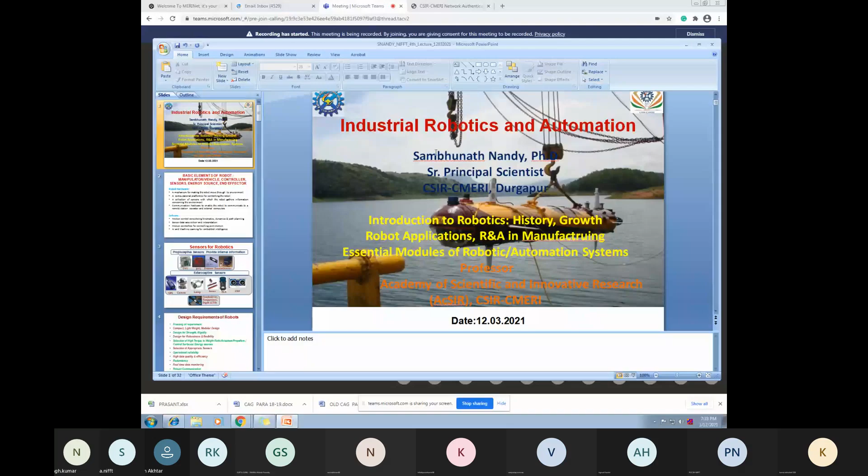Okay, so in our previous class, I think we have started about the basic modules of robots and what are the hardwares and various components of a robotic system required to develop it for industrial applications or other applications. We also discussed the evolution of various robotic systems, starting from a humanoid robot developed by Honda, which they named Asimo, Advanced Step in Innovative Mobility.

Further, we also saw how the development of manipulators took place, starting from 1960, where Unimation Inc. developed a very primitive manipulator. At present, we see various industrial manipulators being used for various applications, starting from manufacturing to completely hazardous environments, nuclear environments, and others.

And probably you know that there are very promising companies like Fanuc Automation, KUKA Robotics, ABB Robotics, or Motoman. These are the pioneers in industrial robotics, and industrial robotics growth is taking place due to the contribution from this industrial sector.

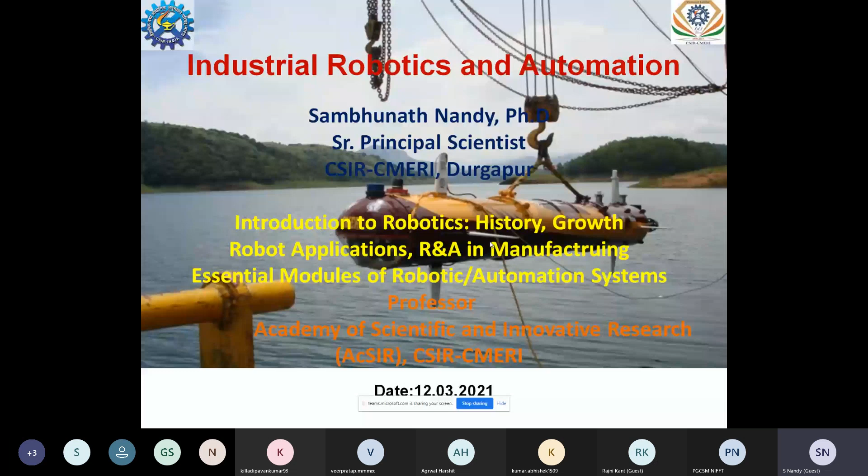Some of these things have been covered in your previous classes, but I will quickly go through this once again. So the basic elements of a robot: robotic hardware, which is nothing but a mechanism for making the robot move through its environment, a computational platform for controlling the robot, and a collection of sensors. This plays a very important role for the robotic system.

Whenever you are applying any automated or robotic system, you need to get the feedback of what your instruction was and what the robot or instrument has performed. Based on that sensory or feedback information, you can calculate the error associated with the system, and in the next step you will be able to provide compensation for the error that has accumulated up to that step.

So sensors, just like our eyes, nose and ears, play a very important role for any robotic or automatic system to get the feedback and to provide the corrections or compensation accordingly.

Then communication hardware to enable the robot to communicate to a remote station operator and external computers. Like if you are deploying a robotic system for a nuclear environment, in that case communication plays a major role.

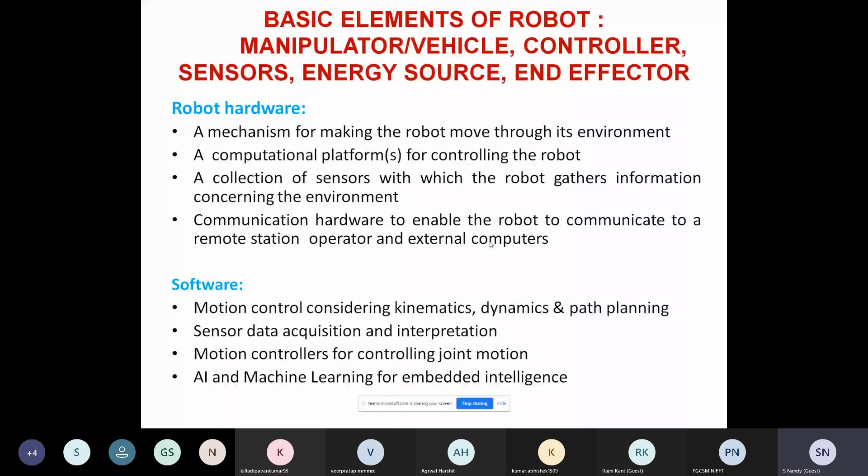So I have also discussed in our previous class that sensors can be classified as proprioceptive and exteroceptive sensors. Proprioceptive sensors provide internal information of the body, like position, velocity, acceleration, etc. Exteroceptive sensors provide information about the environment, like temperature, pressure of the outside environment, environmental view, or range and bearing of an obstacle.

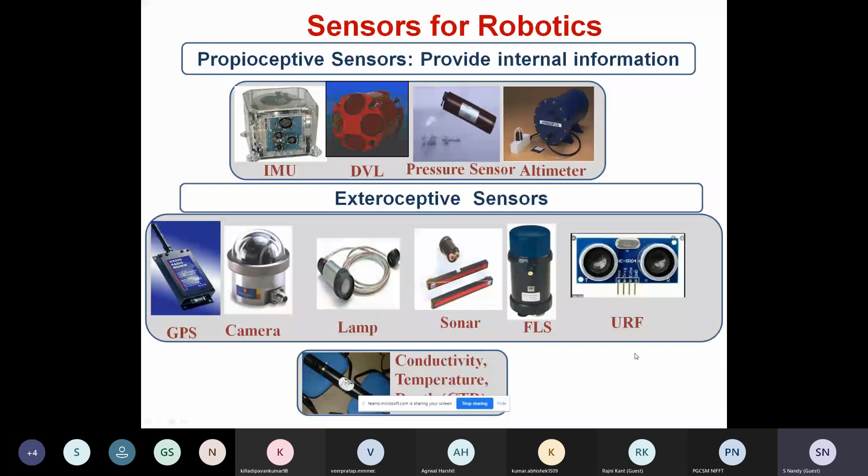Like an ultrasonic rangefinder - what it does is measure the range and bearing of an object, and then that information will be utilized by the robot to avoid the obstacle. Similarly, we use proximity sensors so that a robot doesn't hit any wall or solid object. These are the design requirements that we have discussed in our previous class.

So requirements are very important. Suppose for a manipulator, we need to know the payload capacity, the maximum velocity it should move, and what will be the reach of that robot. Reach means what will be the vertical reach and what will be the horizontal reach maximum. So these three, four things.

And if there are any other restrictions - suppose it is needed to operate in a nuclear environment, in that case the material should be chosen accordingly.

And if there is any weight restriction, in that case also we need to see whether we can use materials like aluminium or some special grade aluminium alloy like 6061 T6 or 7000 grade aerospace material, or some alloy like titanium alloy.

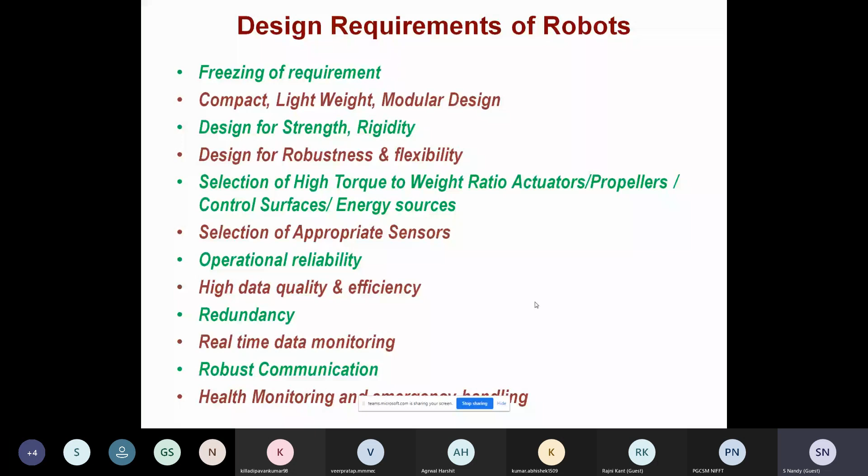This is required, but for each and every robotic system, we need to check the payload it will be handling, the maximum velocity, and the maximum acceleration. We will be able to know the maximum momentum the robot will be subjected to, and accordingly we need to design the structure of the robot so that it doesn't fail with critical parameters when it is handling.

So this evolution we have already discussed, how in space robots also the development took place, and Indian Space Research Organization is playing a vital role in this domain.

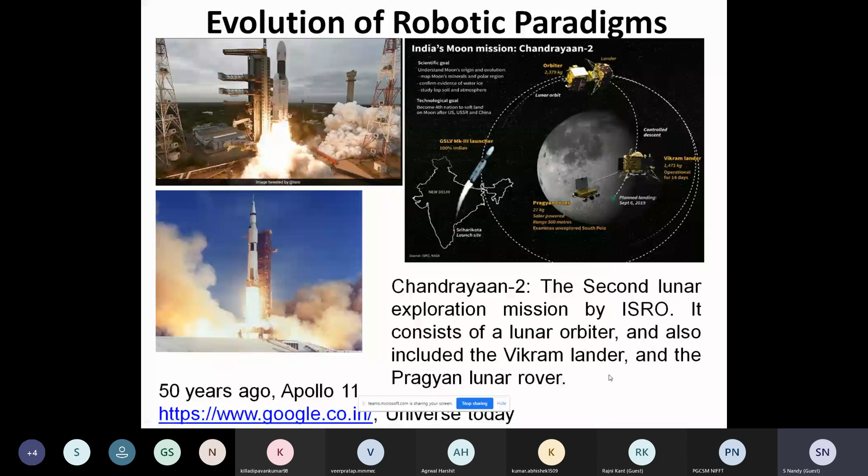Presently, for mobile robot manipulation systems, these are being used in various shop floors, and at present the status is the autonomous mobile robot, which will have onboard intelligence, onboard power, and is flexible. It should have flexible workflows and be able to operate in a collaborative and faster manner.

Collaborative means, suppose there is a work envelope, say a workshop of 300 by 400 meters. In that case, one robot will take some material and hand it over to another robot. The second robot will take the material to another station and hand it over to another robot. That's why it is called collaborative, or sometimes it might be complementary also.

So two robots handling one heavy material are sharing the load. In that case we say it is collaborative as well as complementary. Various kinds of development have already taken place, and KUKA Robotics is also a pioneer in this field.

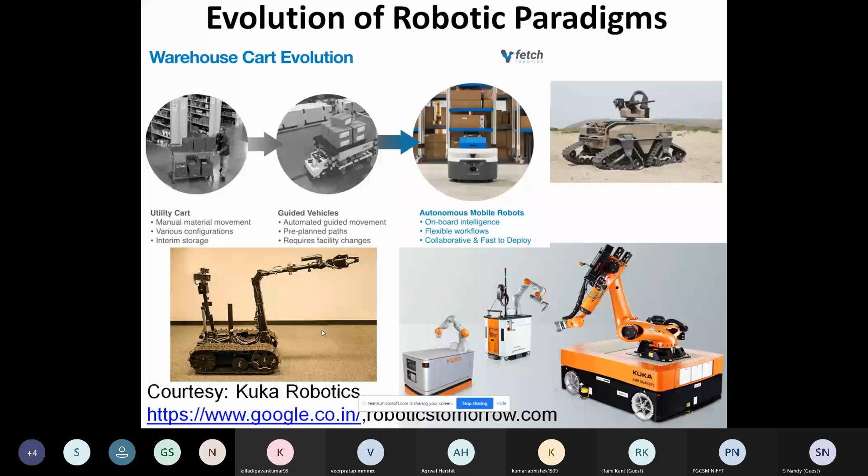This is also discussed, and the manipulator-related rotation matrix, associated mathematical modeling, and kinematics of robots will be discussed by my colleague from the next class.

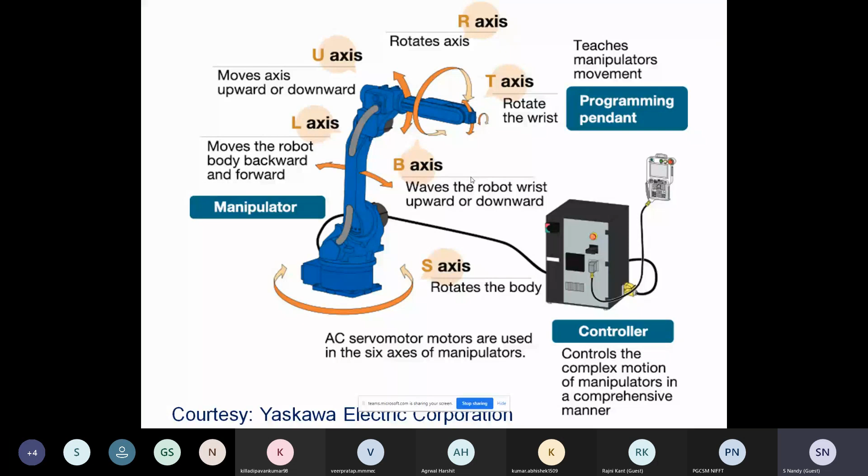So robot manipulators we have discussed, but let us repeat it once again. These manipulators are of two types: serial manipulators and parallel manipulators, and a combination of these two is the hybrid manipulator. This manipulator is a serial manipulator, it has an open link, but the robot is not a closed link structure. It is a serial manipulator, an open loop mechanism.

And this is a parallel manipulator, you can see this is the Stewart platform. This kind of parallel manipulator is more robust compared to the open loop mechanism or serial manipulators. Another advantage of the parallel link manipulator is that it can handle more load compared to the serial link manipulator.

The third advantage is that the Stewart platform or parallel manipulators are more accurate compared to open loop or serial manipulators. Considering the joints of a robot, it may have different kinds of joints. The joints are primarily of two kinds: one is rotary joints and another is prismatic joints. Rotary joint is just like a motor you are rotating.

The motor rotation is fitted with a gearbox, and then you get the rotation as desired based on the gearbox, or it might be fitted with a variable voltage, variable frequency VVVF converter also, so that depending on the frequency variation you get various speeds of that joint. So in this manipulator, the structure shown has all joints as rotary joints, meaning the motor is rotating and these joints are also rotating.

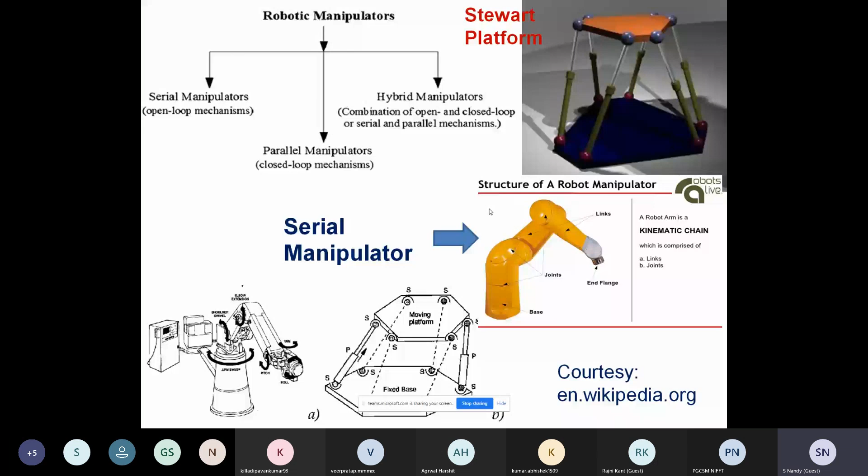Already you are aware that the fourth industrial revolution has taken place, and now we are looking for the fifth industrial revolution. The first industrial revolution is mechanization, water power, steam power - these are the major developments. The second industrial revolution involved mass production, assembly lines, electricity, mass production in the automobile industry, and the use of robots gradually increasing.

Automation and computers came up during the 90s, and from that point onwards mass production took place, with robotic systems or manipulators being used for welding and oiling of cars in the automobile industry.

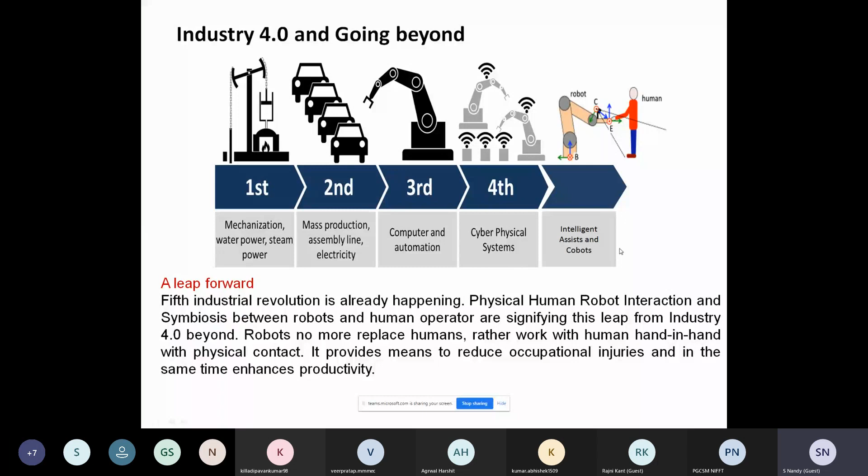Now the fourth revolution is related to the cyber physical system, and probably we will get the information shortly that the present requirement is collaboration between human and robot, where the basic objective is not to reduce the manpower of the industry, but to jointly work together - the robot and human being will work hand in hand, and in that way it will be possible to increase the efficiency of a particular industry as the business progresses gradually.

So five factors are supporting the growth of robotics. The first one is collaborative robots in the automation industry - collaborative robots which can work in collaborative or complementary mode, joining hand in hand, with all the automated features like intelligence, their own power system, and the ability to move along a guided path, or with further intelligence, to avoid obstacles.

Robotics as a service is a new business model. From most Indians' perspective, people are also going for development of service robots, because service robots are still an ever-growing field. Industrial robotics as a domain is mostly matured, but service robotics is still green - there is a lot of scope to further develop in that domain. In India also, people are carrying out research in service robotics so that we can gain some hold within a shorter time.

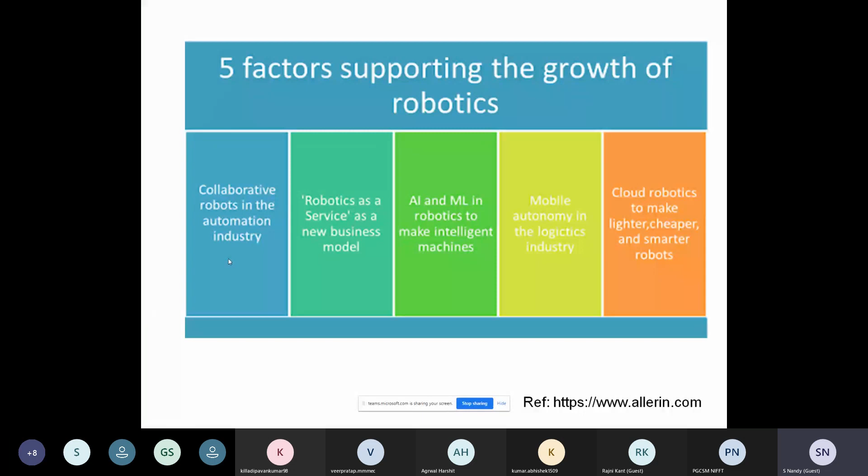Then mobile autonomy in the logistics industry, just like Flipkart or Amazon - they are deploying mobile robots with manipulators also, to carry out their operations faster and increase their efficiency and profit. Then cloud robotics to make lighter, cheaper, and smarter robots. These are the modern tools that people will gradually learn to apply in the industrial domain to increase their efficiency as well as make more profit.

The global market is showing a growth which is really inspiring. The global market for robots is expected to grow at a compound annual growth rate of 26% to reach just under 210 billion US dollars.

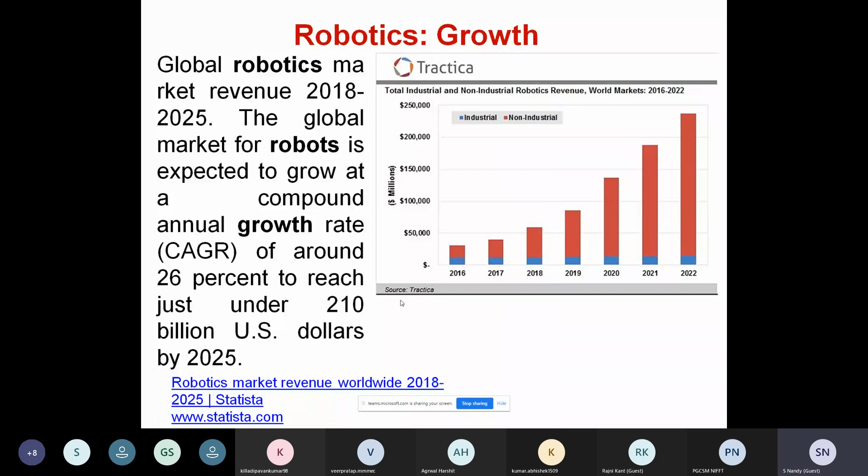By 2025. So if we see robotics and automation in manufacturing, there are a number of questions. Are these robots too expensive for businesses? Is the business too small to make use of robotics? Are robots difficult to program and operate? And will robotics cost human workers their jobs? These are very basic questions, and we need to handle or deploy robots in industry whenever we are able to justify these questions.

Robotic automation can be used across industries by many types and sizes of manufacturing. It helps manufacturers save money and create efficiencies to scale their businesses. This is very important.

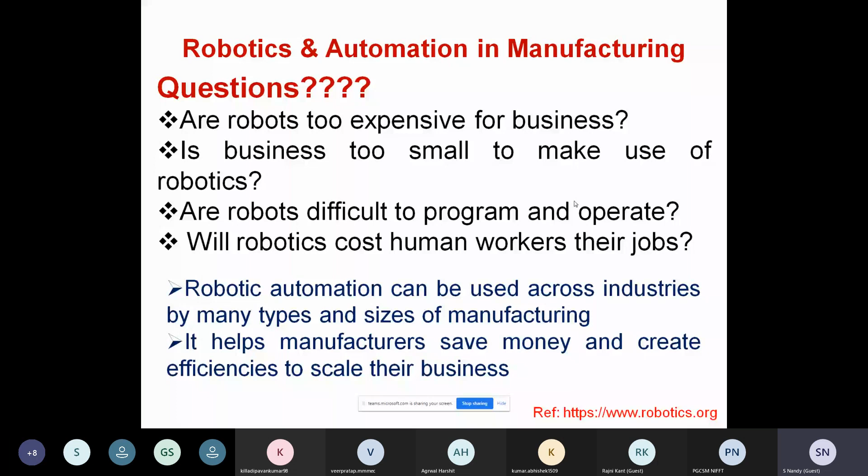Robotic automation has found its way into many different areas of manufacturing, starting from welding, assembly, shipping, handling raw materials, and product packing. This is robotic welding, and in the automobile industry, or for those in heavy industries, foundry, or casting, they have seen use of robots. Automobile industries adopted robotic systems very long back.

Automobile industries have adopted robotic systems for faster production, to multiply their profit. Just think of the spot welding of a car chassis - there are almost hundreds of spot welds required, or more, and that is carried out by robots at a much faster rate compared to what a human being used to do. This is also a tedious, repetitive operation, so it would be very difficult for a human being to carry out that job. That's why the robot is the ideal platform for that kind of application.

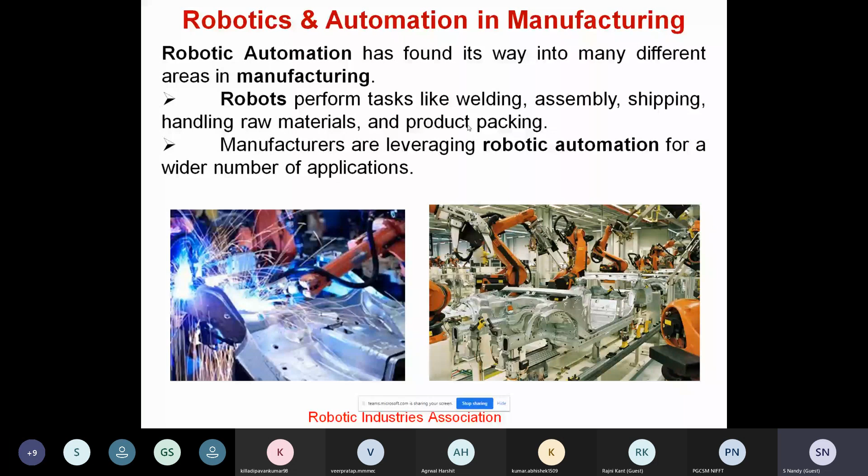Robotics are also being used at present for 3D printing, wire arc additive manufacturing, and various other applications we'll look at shortly. This is wire arc additive manufacturing - using a robot, people are developing a single component which might be very difficult to machine, or if you use a blank of a very hard material, which might be difficult to machine. Additive manufacturing or 3D printing helps develop that kind of material using the technique of wire arc additive manufacturing.

Think of a turbine shaft, where erosion takes place in a power plant, where turbines are used and the turbine blade or shaft gets eroded. In that case, robots for additive manufacturing, through laser cladding operation, can repair that. Present day, this kind of robotic system is very common around the globe, and some industries in India are also developing or have deployed this kind of robot to repair costly components which may not be possible with conventional methods.

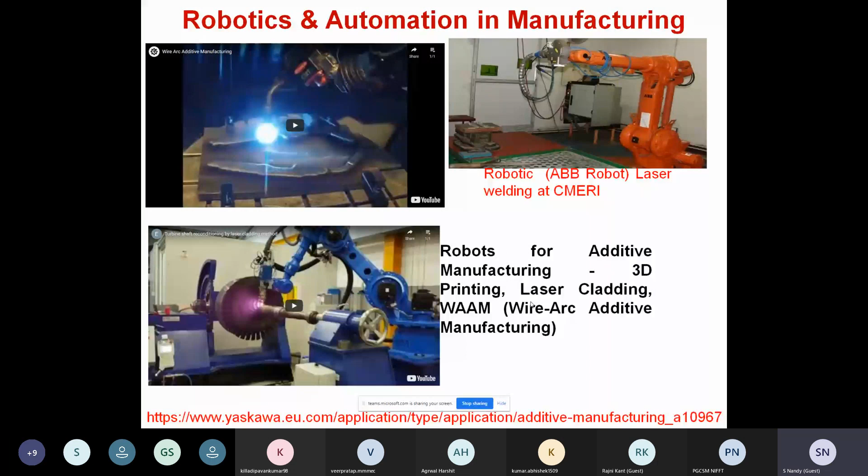At CMERI also, we are using laser welding with the help of an ABB robot, which is around 600 watt capacity. The use of robots for additive manufacturing is growing day by day, and it is a great step to achieve components like crane hooks or other single components at a reasonable price compared to other methods, if the quantity required is less.

Foundry robots can perform a variety of applications, including but not limited to die casting, gravity casting, sand casting, finishing, water or chemical cleaning, and forging. The major manufacturers of foundry robots are Motoman, Fanuc, KUKA, and ABB. Modern foundries are constantly looking to improve efficiency with the use of these Fanuc, KUKA, or ABB robots, increasing efficiency and flexibility.

It also improves workspace safety, because the temperature of a foundry shop when casting takes place is really very high, and it becomes difficult for a human being to sustain that temperature. That's why workplace safety is very important, and it is not feasible for a human being to operate in a dull, dirty, dangerous, and difficult environment. That's why people are gradually replacing humans in the foundry shop with robots to increase efficiency - not taking their jobs, but deploying robots to increase efficiency, productivity, and profit.

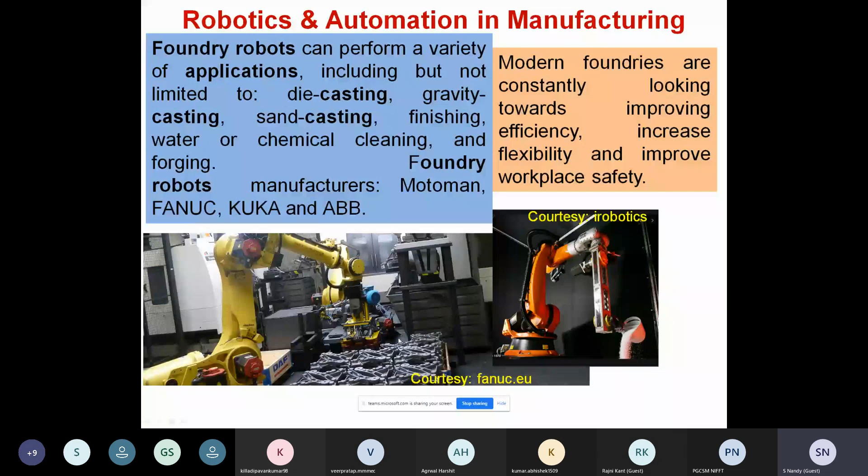Here are two robots, this one is from iRobotics. You can see that hot metal is being deployed, and this robot arranges casting components in whatever manner you require. Robotics basically saves money and time.

Robots first started being used in industry in the early 1960s. In the history of robotics, Unimation Inc developed the first primitive industrial manipulator.

Robots can now be installed in less time and less cost. A lot of robots have become modular, and programming also becoming easy. So it is not that to deploy any robotic system, the person working with the robot needs to know everything from A to Z. It is not required. He only needs to know how to operate the robot with the help of a GUI, the graphical user interface. He needs to know the initial starting point, the goal point, and how the instruction will be passed to the robot. So robots can now be installed in less time and less cost.

Increased sales have seen the prices come down dramatically, and built-in state-of-the-art facilities in the robotic system are being deployed nowadays. Basically, all the electronics components are being miniaturized day by day, and the size of the robotic system is also becoming compact, but the capacity is also increasing.

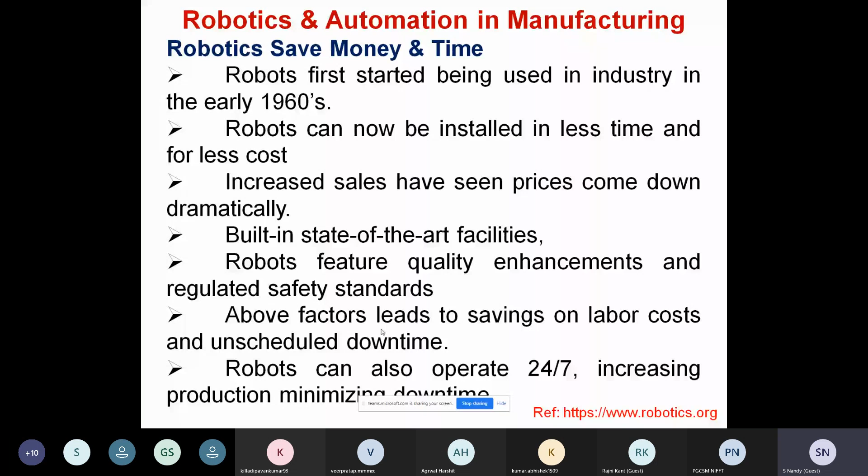Robots are scalable. Robots are used in high production, high volume environments, and can also scale down to be used in growing businesses. Modern robots can be used in low to medium volume manufacturing environments. Robots can be programmed and set up for new tasks quickly, and mobile bases allow them to be used in multiple areas of manufacturing facilities.

Just like in our first class, we showed a robot that can be deployed in a manufacturing environment for inspection purposes, and if that component is qualified for dimensional inspection, it can be transported to a particular place for further utilization. So mobile bases allow them to be used in multiple areas of manufacturing facilities.

Just like here, you can see the KUKA robot, which is attached with a manipulator deployed over that. This platform can be used separately, or the manipulator can also be used separately. But as a whole, these two can be interfaced and utilized in an integrated manner for various applications.

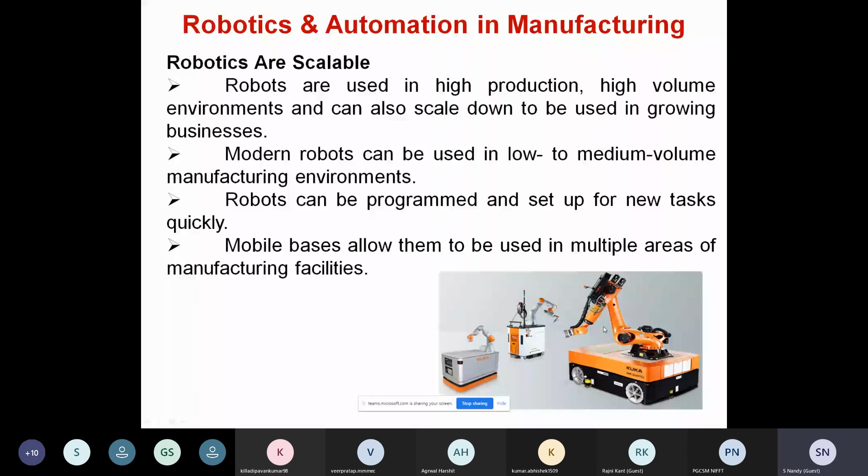Robots are easy to program. Learning complex programming languages to teach robots is not required or essential. If you are a robot developer, then it is required. Otherwise, from an application point of view, you don't need to know the complex programming of the robot.

Some of you may be acquainted with operation of CNC machines, where you need to know all the details of the steps the machine needs to follow to carry out a particular operation, using G code or M code wherever required. In robotics applications too, a person working with the robot should know how to operate the graphical user interface and how to enter coordinates for a particular desired application. Normally, robot programs can be achieved in two easy methods.

One is offline programming. Here you need to model a complete cell or work envelope and develop the sequence of moves for a particular task. After checking this program, it can be directly fitted into the robot to carry out that operation. This offline programming is very useful to avoid any accident with the real robot. You can check it through simulation, and after satisfaction, load this program into the real world.

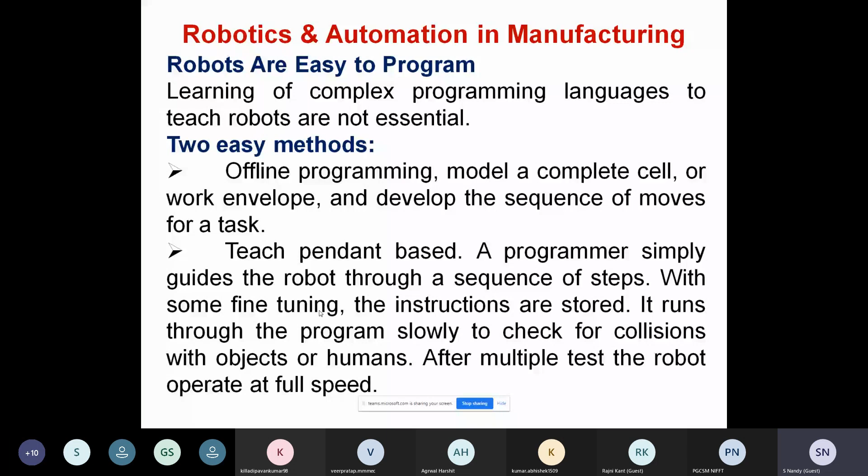So robotics creates more jobs. It is not that robotic systems take away the job of laborers or professionals. Manufacturing can compete by creating more jobs in robotics and associated fields, such as programming, where people develop new robots for various industrial applications.

It might be service robots—for example, if you want to inspect a ship hull, you need underwater robots for that, which is a completely unstructured environment. You need to know what kind of damage took place in the ship hull, and if it's a very big ship, the entire surface needs to be inspected with the help of robots. So multiple robots can do that operation within a shorter time.

If you are using a single robot, the operation time will be comparatively high, and you need to interpret the data also. So programming is a very essential part of a robotic system.

Then there's engineering to make the robot more compact or lightweight to achieve the same desired goal, and end effector design—what kind of material the robot will handle, whether magnetic or non-magnetic, or whether the end effector should have dexterity properties, meaning sensing of force. For handling soft materials like apples or eggs, you need to apply force in a way that doesn't damage the object, or to handle glass, the rigidity of the end effector and the force applied also matters.

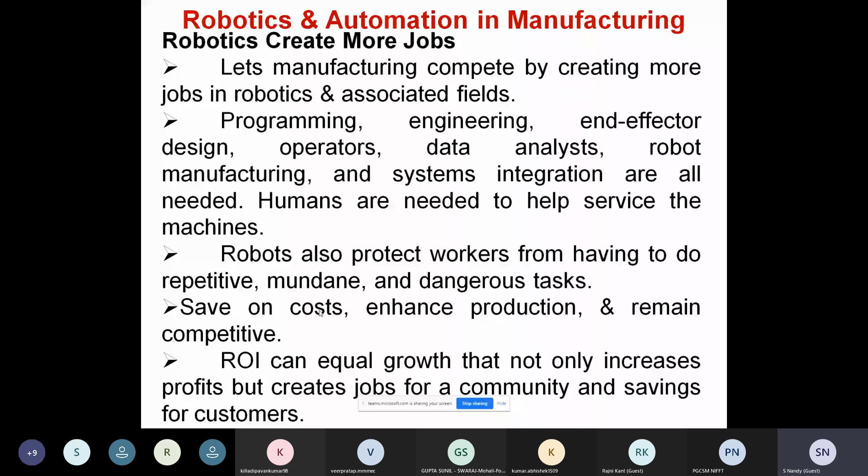So the essence is that the deployment of robotic systems for industrial applications has a lot of scope to increase the efficiency, productivity, and profit of business enterprises. It also creates avenues for programming professionals, engineering professionals, end effector design and structural analysis, operators who operate robots, data analysts who interpret collected data, and manufacturing of robots and system integration.

So for this robotic system, I have given some glimpse of the basic modules, but if we repeat again, these are the kinematics.

So kinematics deals with the motion of the robot. Every robotic system is defined by a coordinate system, and coordinate systems are of two types.

Coordinate systems which are fixed are known as global coordinate system, and the one attached with the moving link is known as body coordinate system or moving coordinate system. The basic importance of the body coordinate system is that velocity or acceleration are measured with its help.

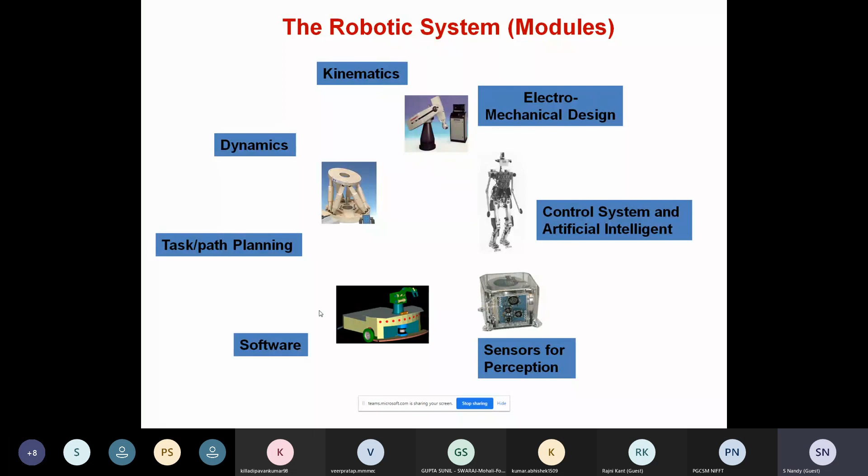And of course, the primary thing is the electromechanical structure design. As you are looking after a robotic or automated system, it's a completely mechatronic system where there will be mechanical structure considering the strength and rigidity of the system, and a number of electronic interfaces or hardware through which we will be able to implement the automated features we require for a particular domain of applications.

So these are the basic modules for a robotic system. These are very important. First you need to select the robotic system for what application it will be designed, and then you need to carry out a primary design.

Then you need to choose the actuators, energy system, whether it will be teleoperated or using conventional power, or whether you will be looking for remote robotic system, or an autonomous robotic system.

If it is an autonomous robotic system, it should be powered by battery, and batteries are of different kinds. If you want to make the robot lighter, you need to use lithium polymer battery, which has high energy density, while lead acid battery might not be so suitable for robotics applications. Even the battery should be rechargeable. So you need to choose the energy source.

Then you need to calculate the system weight, and if you find that the system weight is more than what is desired, you need to reiterate.

You need to study the hydrodynamics of that system, or you need to do computational fluid dynamic modeling, so that you will be able to make your system slim through this analysis. Whatever rough calculations you have made for your primary design, you can fine tune it with the help of hydrodynamic modeling or computational fluid dynamic modeling.

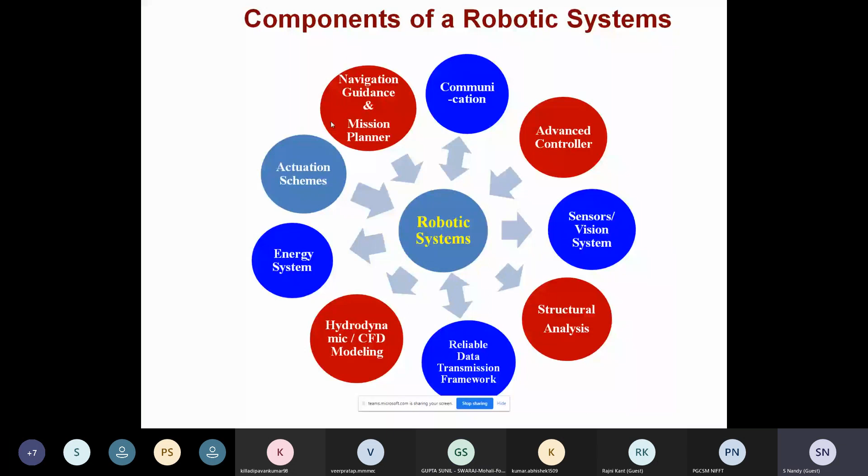So in a simplified form, a robotic system or automated system will have a mechanical structure. Like a robot which needs to handle a payload of suppose 60 kg or 100 kg, in that case the structure should be strong enough. So you cannot just say this is a strong structure, we need to do some analysis.

It might be finite element analysis, or with the help of software packages like CATIA, or Adams package, or some sort of SolidWorks. These kinds of packages are required to carry out the analysis of the robotic system. So CATIA, Adams, or SolidWorks - these are the things.

So here the mechanical structure is the backbone, just like our structure. That mechanical structure should be strong enough to handle a payload of suppose around 100 kg, and not only the 100 kg, you need to know what velocity the robot will move at. That will also induce an additional factor for strength and rigidity calculation.

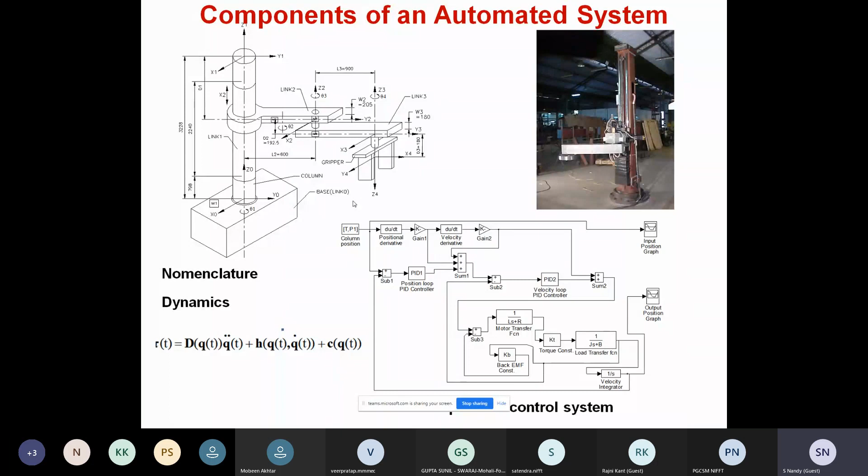Okay, so this is the first module. Almost I have covered most of the things. Whatever time has been allotted, almost I think around 5 hours we have taken. So these are the basic preliminaries, including the history, the growth and application of robotics in manufacturing industries, and how the evolution of robotics in different domains took place. What are the basic components of a robot, and what are the basic components of an automated system in that manner.

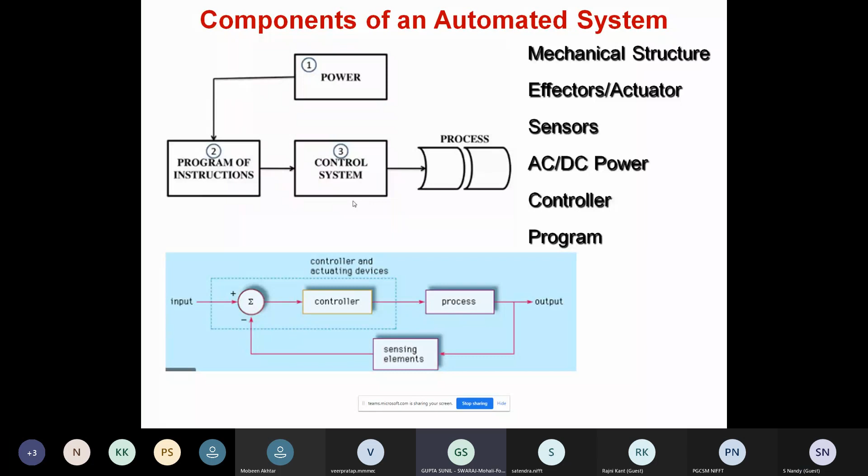Sir, it is okay. If we have any questions, we will discuss with you later. Okay, then thank you so much, and we'll be...